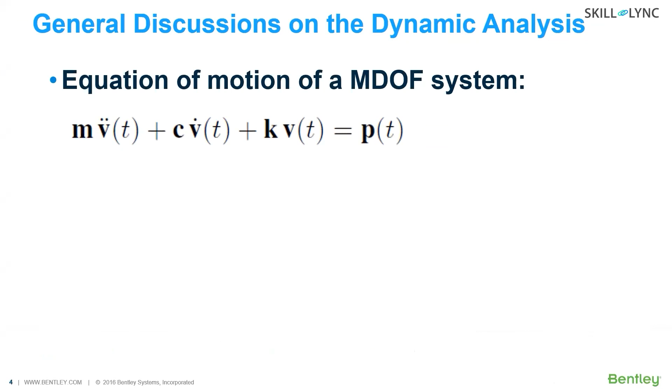So of course we can start off with the equation of motion, which is the backbone of the dynamic analysis of structures. I've taken this as a screenshot from Clough and Penzien's Dynamics of Structures book. So basically, when you have a time variant load applied on a structure, the structure resists it in three ways: as inertial load, as a viscous load, and a spring load, or a stiffness elastic load.

And to solve this equation, what STAAD Pro actually does is employ something called a modal superposition method, where this differential equation is broken up, or uncoupled, into n separate differential equations. And to get the solution of those equations, we would need to solve the Eigen condition. So what appears on the screen is the Eigen condition.

Now, STAAD Pro would employ numerical methods to solve this condition. Just a quick note on Eigen solution: there could be two possible solutions to this Eigen condition. As you can see, one is if the mode shape vector is 0 - that's a trivial solution, because that would mean the structure is not vibrating at all. The non-trivial solution is when you have this expression as 0, and that is what needs to be solved.

So if you actually write that in the form of an algebraic expression, it would result in a polynomial equation of degree n, and thus you would be solving for omega square, since the stiffness matrix and mass matrix are known to you. So what you would be solving for is the value of omega square, and you would get n values of omega as a solution of this.

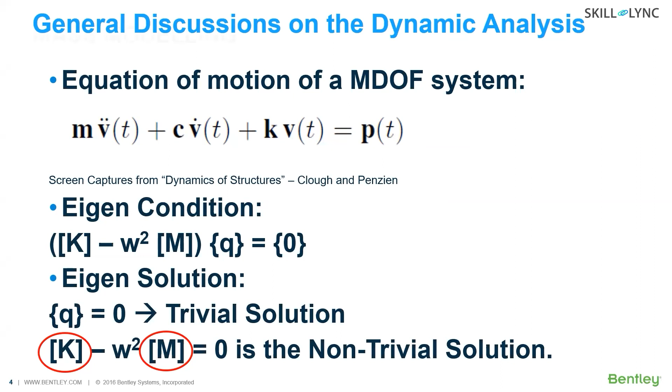Now, one important thing to note here is to have a proper Eigen solution, you need to have a proper stiffness matrix and proper mass matrix. Now, the stiffness matrix is sort of generated out of what you model as the structure, but the mass matrix needs a specific mass modeling. So we will talk about a couple of quick pointers on the mass modeling.

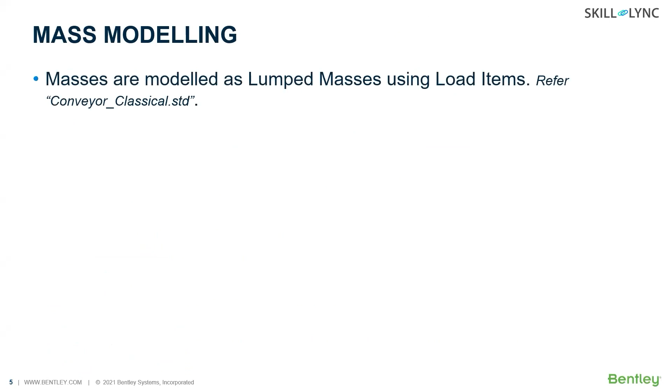So in STAAD Pro, masses are modeled as lumped masses using the various load items, and the load values that you define in those load items - those are force units - you would divide them by the acceleration of gravity, the value of g, to obtain the masses.

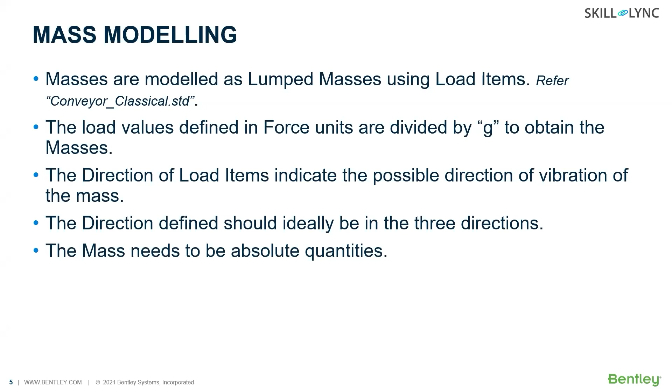And you know that mass is a scalar quantity, right? It doesn't have any direction. But when you define a load, you would define the direction of the load as well. Now, those directions represent the possible direction of vibration of the masses. And to capture the proper dynamic effect, you should specify the direction of vibration of the masses in all three directions. The masses need to be absolute quantities, because this would rule out the possibility of erroneous cancellation of masses.

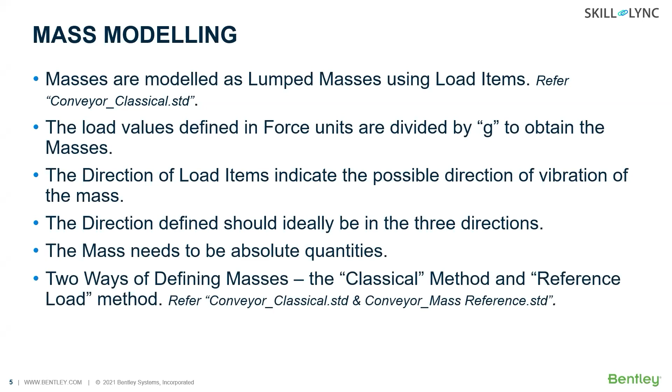We have two ways of defining masses, the classical method and the reference load method. Let me quickly show you how we have done this as a classical method.

Basically, we have this load case one, as you can see in this particular structure. You would see that we have defined the loads as absolute values, in all three directions. But the question may be, then how does STAAD know that these are masses and not loads? Those are distinctly two different things.

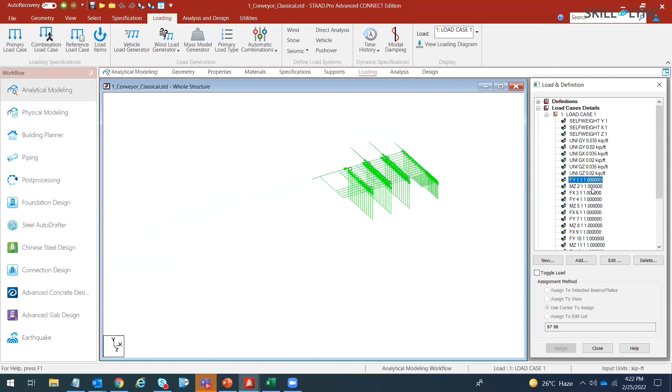Now, any load case that has any dynamic commands involved in it - in this case we have time history commands, which are dynamic commands. Other possible dynamic commands can be the response spectrum specifications, or the modal calculation requested specification. All this would convey to STAAD that it's a dynamic load case, and it would then treat the load items defined in that load case as masses and not loads, dividing the load values you have given by the acceleration due to gravity to get the mass values.

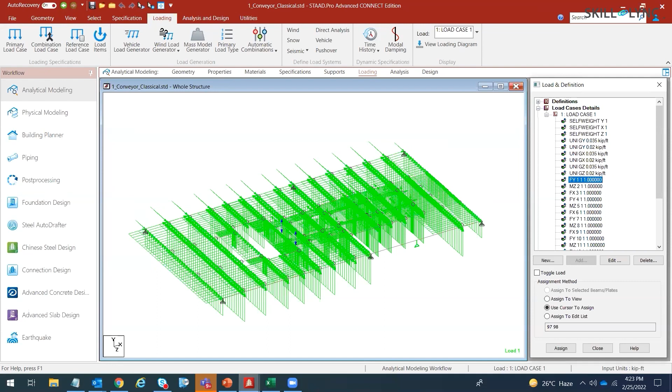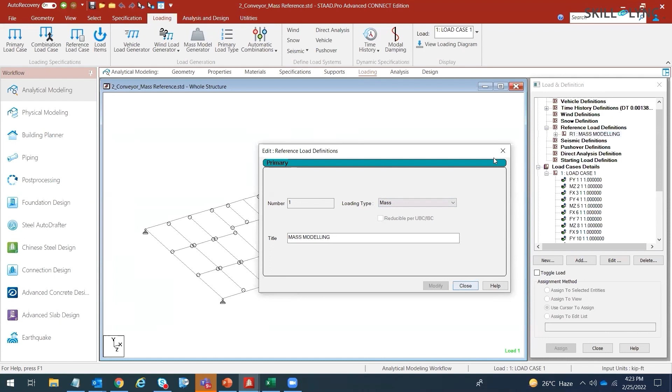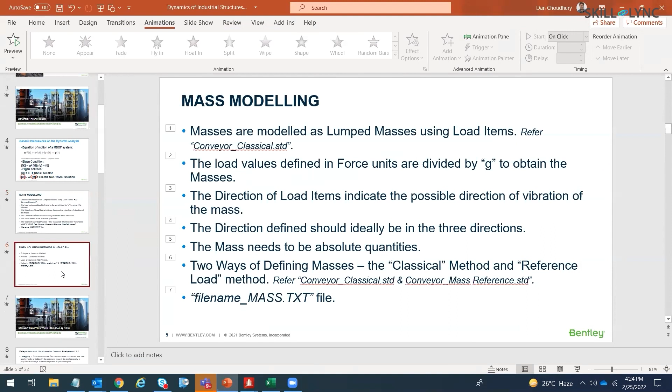So these are some general pointers as to how you should be defining the masses in STAAD Pro. We have seen that users make a lot of mistakes when doing this mass modeling, which results in a completely different set of natural frequencies and mode shapes, because we can see how important that parameter is for the Eigen solution.

So now talking about the Eigen solution methods in STAAD Pro, we have the subspace iteration method. You may be knowing that STAAD Pro has two modes: one is normal STAAD Pro, the basic version, and STAAD Pro Advanced. Both STAAD Pro and STAAD Pro Advanced have the subspace iteration method, a numerical method of solving the Eigen condition. In STAAD Pro Advanced specifically, you also have the Arnoldi-Lanczos method of solving the Eigen condition. Both of these are extremely well-known numerical methods to solve the eigenvalue problem.

But the advantage of Arnoldi-Lanczos method is that in systems which are huge or substantially larger, you would have a faster convergence of solution using the Arnoldi-Lanczos method than a subspace iteration method. But both of them are equally stable methods.

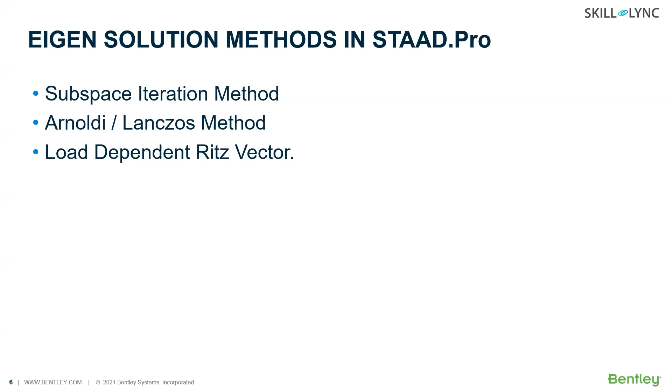I would like to talk about a specific type of eigen solution that we have, which is the load dependent Ritz vector, where we do not solve the eigenvalue problem using the natural modes, but we use the Ritz vector instead of the natural mode shape vectors. Now let me show you a quick example of how this load dependent Ritz vector can help.

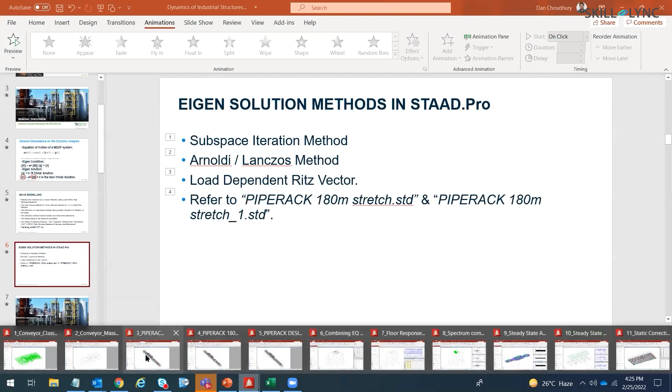Let me go to this particular STAAD model, and you can see that this is the model of a pipe rack structure, which is very long and is a common case that you encounter in industries or industrial structures. I have already run the analysis of these structures to save time, and if you look at the participation factors of this...

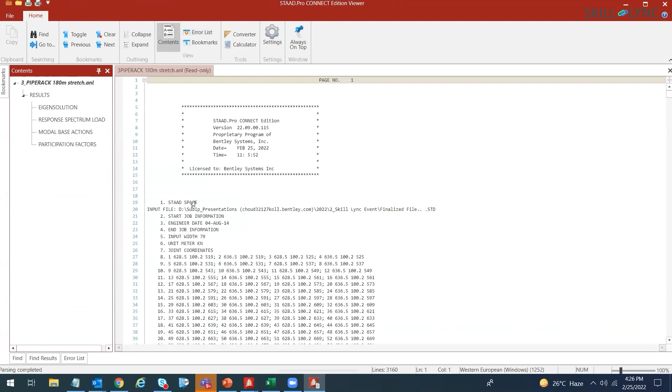Let's say that you are doing a seismic analysis for this whole structure, and you are doing a response spectrum analysis. The code would require you to achieve a 90% mass participation in either direction.

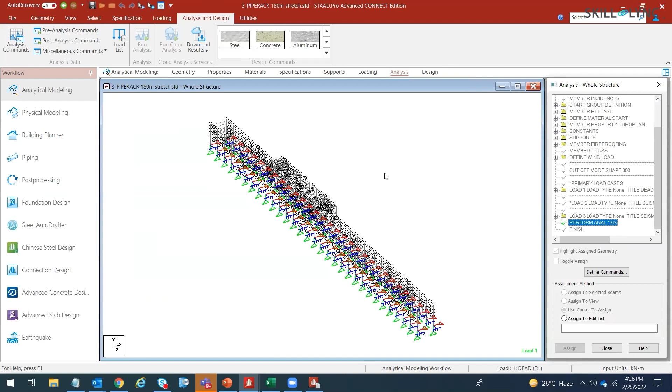Now, if we look into the participation factors here, let me make the fonts a bit bigger so that you can see that easily. So you can see that we do have some good participation in the first 3 or maybe first 5 modes, but after that we have very insignificant mass participations, a lot of which is due to local flutter. Once you are satisfied that this is not due to any instability problems, you know that these are insignificant modes which don't help you obtain your total mass participation.

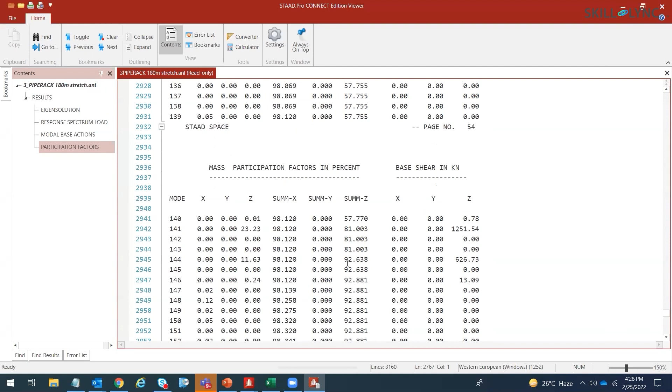So you can see that to get a total mass participation in the X direction of 90%, you need to run the whole system for at least 53 modes, but you do not have any mass participation in the Z direction. For getting the mass participation in the Z direction, you would need to run for even higher modes, and you would see that finally, in the 144th mode, you obtain the mass participation of 90%. So it's a clear indication that there are a lot of insignificant modes in this structure.

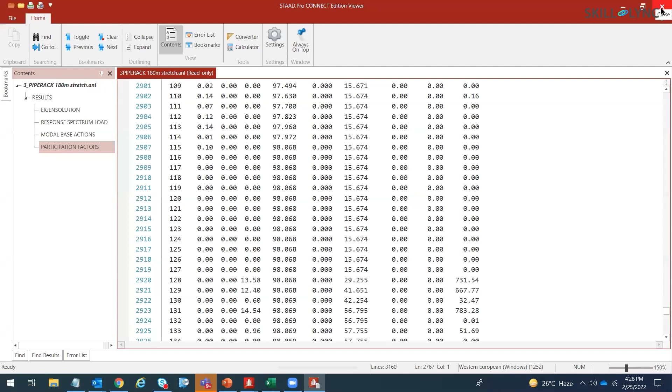And if we use the natural mode shape solution to solve the eigenvalue problem, or the natural mode shape from the normal eigen solution that we have done, we would need to run for a lot of modes. Instead, if we use the Ritz vector, one of the things that you could do is, okay, let me show it this way.

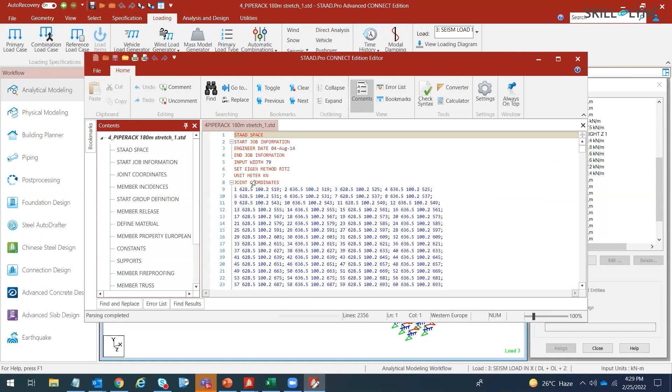So if you go into the text editor here, you can see that I have set the eigen method as Ritz. And if you actually run the Ritz vector, what will happen? You'd see that we actually obtain the participation in just 20 modes.

And you can see that we have run it only for 20 modes, and the first 13 modes gave a 90% participation in the X direction, and for the mass participation in the Z direction, 90% mass participation, we had obtained it by the 18th mode.

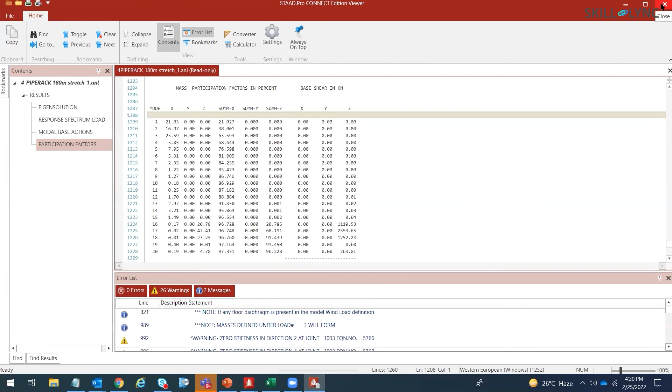So it saves a lot of unnecessary time and unnecessary analysis time if we use Ritz vector instead of the natural mode shape vectors. In fact, a lot of the dynamic pundits around the world suggest using Ritz vector rather than the natural mode shape vectors. So in STAAD Pro, you can use either of it.

If you want to use the natural mode shape vectors, you can use the Arnoldi-Lanczos or subspace iteration method of eigenvalue solution. And if you have a lot of unnecessary insignificant modes, you can flush them out by using the Ritz vector.

Okay, now let us go back to our slides. And this is the topic that we are going to spend a significant amount of our time on, which is the seismic analysis to IS 1893 part 4.

To start off, sorry, I'm still in the eigenvalue solution mode. To understand IS 1893 part 4, I'm sure you know about it already. Part 1 is a well-known code meant for solving, or meant to guide you as for the seismic analysis for buildings or any other general structure. IS 1893 part 4 is specifically meant for industrial structures.

There are two parts to that code. One is meant for general industrial structures, and the other section is specifically meant for stack-like structures. We are going to speak only on the general industrial structures for now.

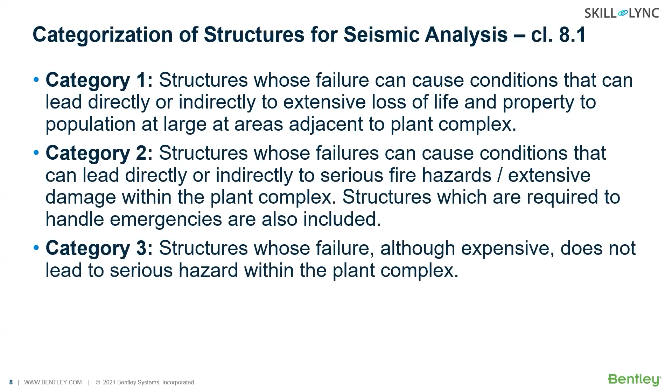Category 2 structures would be whose failure might cause serious fire hazards and extensive damage within the plant complex. Category 3 structures would be those which the failure of which might be expensive but does not lead to serious hazards. Apart from all these three categories, all the other structures would be categorized as category number 4.

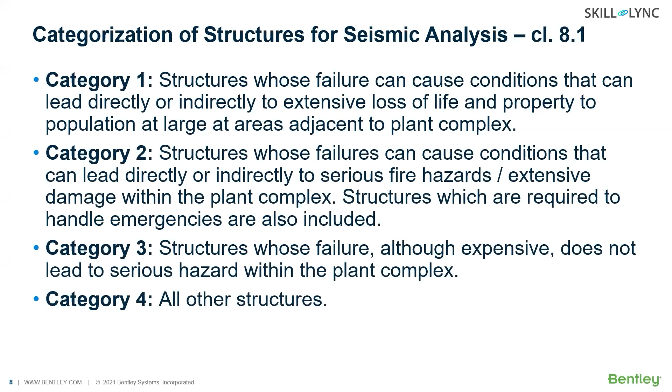Now, when we speak about the code, we will see how important it is to understand these particular categories.

The code in clause 10 also gives us situations where we can choose to use dynamic analysis, or we have to use dynamic analysis, and there are situations where we can choose to use static analysis instead of dynamic analysis.

So structures of category 1 in all seismic zones, you have to do a dynamic analysis. Structures of category 2 in seismic zones 3, 4, and 5, you have to do a dynamic analysis.

Structures of category 3 in seismic zones 4 and 5 have to do a dynamic analysis. All the other structures can be analyzed using the simplified static analysis. We are not going to discuss the static seismic analysis in this course. The title is about dynamic analysis, but I just wanted to let you know at this point that

the simplified analysis has also been implemented in STAAD Pro. The dynamic analysis can be in two categories: time history analysis and response spectrum analysis. So this is what the code says.

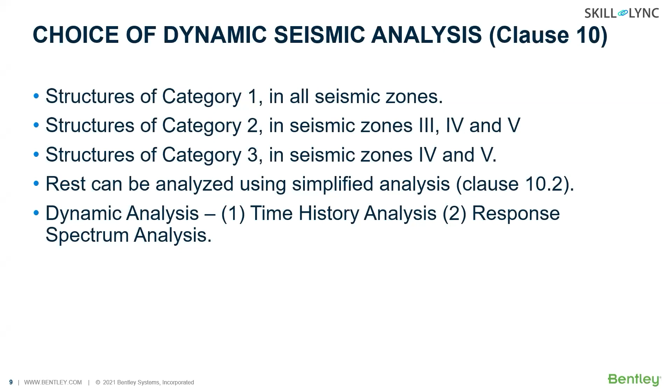Now there are a couple of additional mass modeling guidance that the code gives. This would be in addition to what I had just discussed, and what the code has suggested is to consider the structure equipment interaction properly. Industrial structures generally have a lot of equipment stacked on them, like cable trays and pipelines. There are also vibrating machineries that sit on industrial structures. So you have to consider the interaction between those equipments and the structure.

That's why there are some additional mass modeling guidelines given in the code. If your structure has rigidly mounted equipment which is rigidly connected to the structure, you can model those as lumped masses. There could also be flexibly mounted systems that are stacked on the structure.

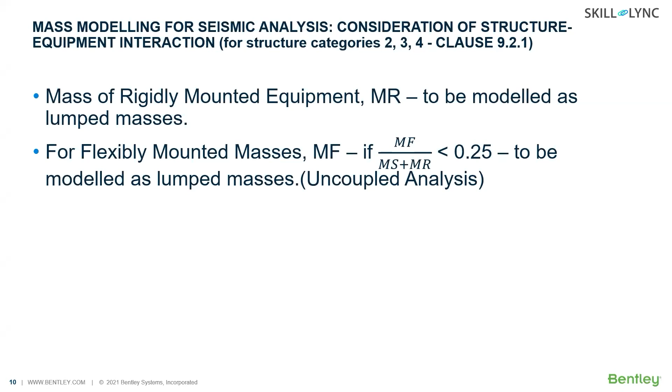Flexibly mounted system would mean equipment that is positioned on the structure using isolator supports, and you can still model them as lumped masses if the percentage of the flexible masses is less than 25%. But if the percentage of flexible masses is greater than 25%, the code envisages that this would lead to a structure equipment interaction, and you have to do a coupled analysis.

So the code suggests to actually model the support system. Now, at this point, we do not have the modeling of isolator support systems in STAAD Pro, so we can only do an uncoupled analysis using the lumped masses at this point. So these are some additional guidelines that the code gives for seismic analysis of industrial structures.

Now, what I have just discussed is only valid for category 2, 3, and 4 structures. A category 1 structure has a different requirement, which I am not discussing here.

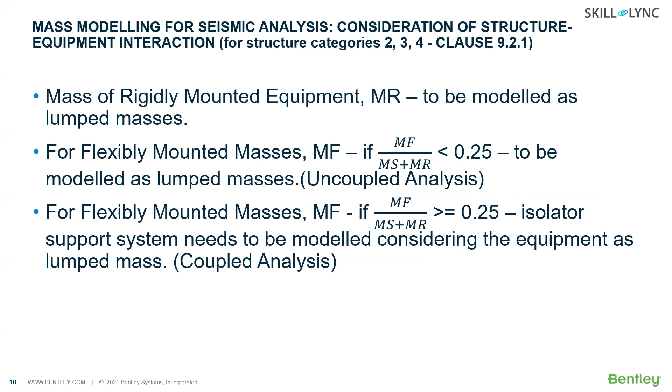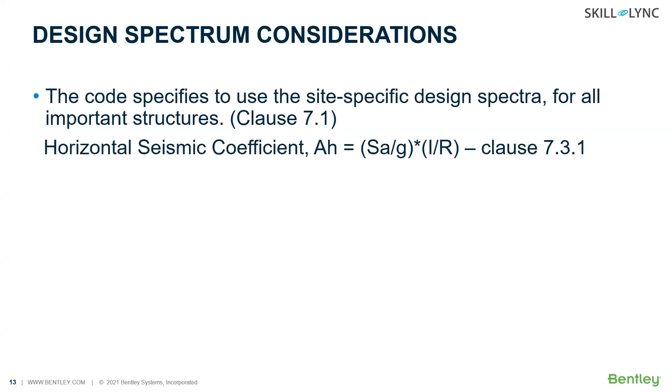Though if your SA by G values in this equation are not scaled to the peak ground acceleration, then you have to multiply that with the peak ground acceleration to scale it to that particular value. The code suggests that you have to compare that analysis with the standard design spectra that is given in Annex B of the code, which has to be taken as a minimum.

For less important structures, you can directly use the code-specific response spectrum. And of course, the horizontal seismic coefficient is given by the well-known equation that is given here.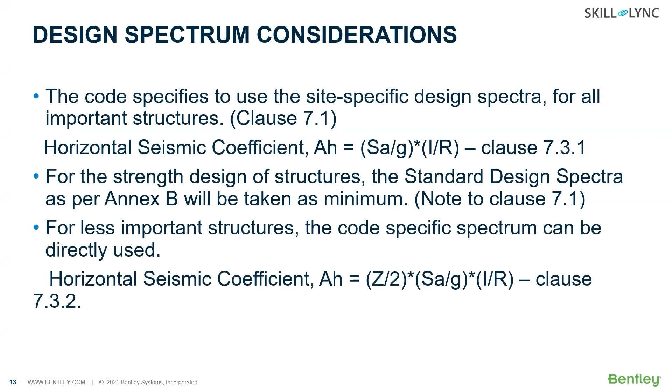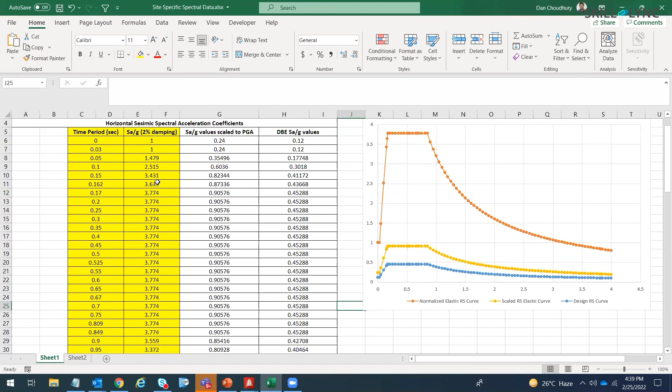Now I just wanted to show you something. I had data on site-specific spectra, which was sent to me by somebody. It was a steel structure, so I have only taken the 2% damping values here. You can see that against the 0 period, we have the SA by G value as 1, which is a clear indication that this has not been scaled to the peak ground acceleration.

If the response spectrum data is given in this way, then the report would also have the recommendation for the peak ground acceleration to be considered. In our case, we can see that the peak ground acceleration is 0.24 G that was given by the report.

So that would mean that your spectrum, which originally—this is the elastic spectrum, the brown spectrum that you see—that's the normalized, unscaled elastic response spectrum curve. And when you scale that to the peak ground acceleration of 0.24 G, which would mean that you need to multiply, these are the scaled values.

So you need to multiply the unscaled values with the peak ground acceleration to get the scaled values here. And then the blue colored spectrum would give you the design basis values, the values that you would need to use for design.

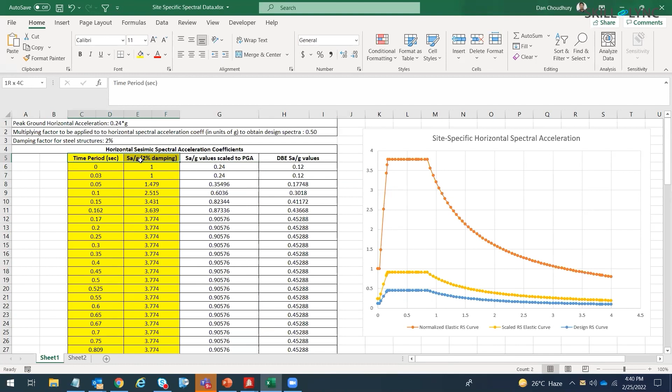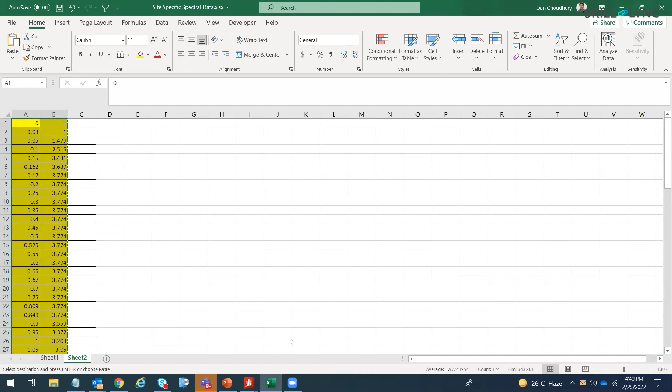But you do not need to manually do this as I've done in this Excel sheet. All that you can do is define these values directly in STAAD Pro. So what I have done is I have taken these values in another sheet like this, and what I can do is copy these values and take it to... I'll add response spectrum load case here.

So all that I do is I go and paste this value. So I have actually unscaled elastic response spectrum curve. I have defined the data here.

And I can select the code, and you can see that we can select the IS1893 part 4 2015 code. And the combination method is I would always prefer CQC. The code suggests a few methods, but CQC I've always preferred because it takes care of any possible interaction between the closely spaced modes. So we take that as CQC. Oh, I think I had messed up something.

Anyways, I need to choose the custom response spectrum and paste the values here. Let me check if I've done it correctly. Okay, yes. Now, you know that these are the unscaled response spectrum values.

So we need to scale that down to the design basis values, as I have just shown to you in the Excel sheet. So how can we do that? We can do that using the direction factor.

So we need to define, let us say that we want to define the seismic load in the X direction. So what would be the direction factor? Let me quickly show you the calculation of what the direction factor would be.

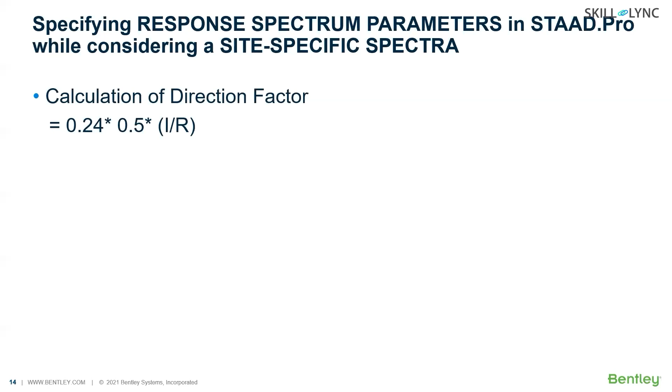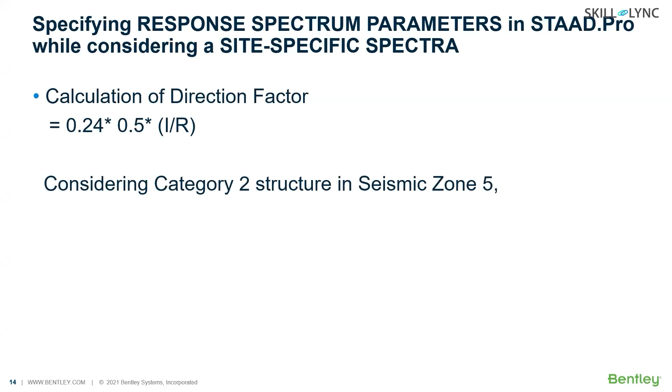So let us consider that our structure is a category 2 structure, and let us say that it's in seismic zone 5. In that case, if you look at table 3 of the code, the importance factor would be 1.5, and the response reduction factor, considering a steel frame with concentric braces, would be 4. So the I/R value would be 1.5 by 4, that is 0.375.

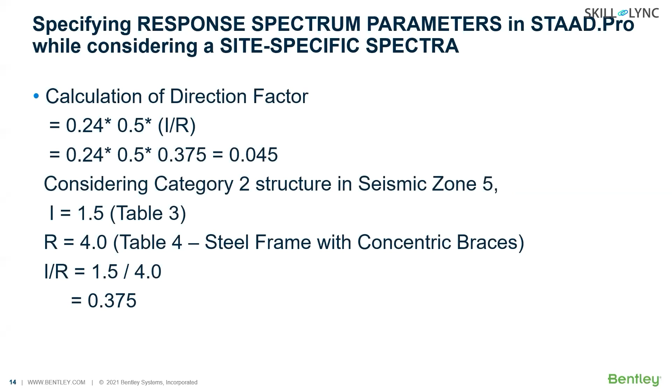Now, if we substitute this value in the direction factor calculation, we get the direction factor as 0.045. So that's what we need to use as the direction factor. The time really is running out, so I have to do this fast.

Okay, and damping. Now we have to specify this as the damping value. Now a lot of users ask us this question - we have already defined the spectrum for 2% damping, so why do we need to consider damping value again?

Does this reduce the spectral acceleration defined even further? The answer is no. We would need this damping value to define the modal combination, because if you look at the expression of the CQC modal combinations, it has the damping factor in it. So this damping factor that we define here goes into the calculation of the CQC combinations.

Okay, so we define the damping here. Now, next thing that we do is we need to define the scale factor. Now, in this case, we have the SA by G values, so we need to scale that up, multiply that by the value of G. So we have to multiply that with 9.81.

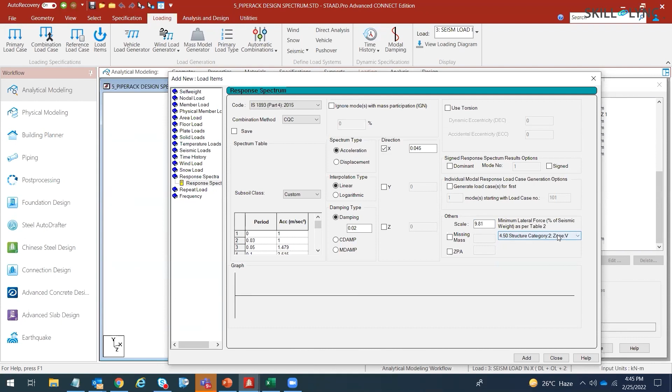And then the code requires, as per table 2, that you have a minimum lateral force requirement. There's a minimum lateral force requirement in table 2 of IS 1893 part 4 code. And for category 2 zone 5, it is 4.5% of the total seismic weight. So we select that value and click on add. This completes our spectrum definition.

This is how you would need to define the spectrum specification to IS 1893 part 4 in STAAD Pro. Now, remember that the code also requires you to check it against the code's based design spectrum.

Actually you need to have another load case. This is currently not automated. You need to have another load case with the code specified design spectrum. You have to check the base shears, and if the code based design spectrum base shear is higher, then you have to scale up the first results. So you have to find out the ratio and take that ratio as the scale factor, and then you delete the load case related to the response spectrum that you have defined from the code.

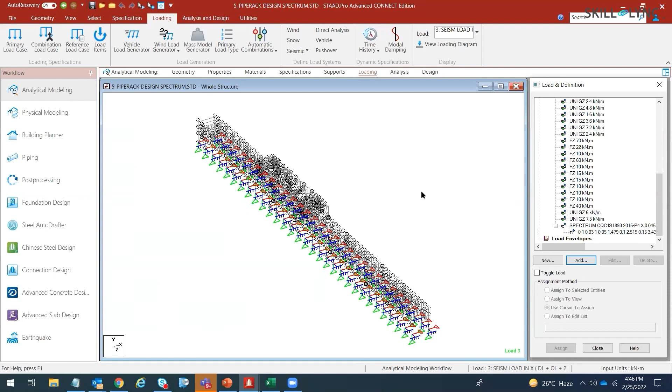Okay, so that's the response spectrum. Quickly wanted to talk to you about combining the component earthquake load cases.

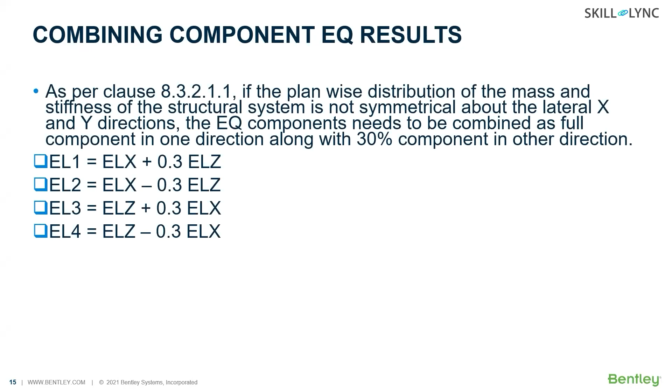Now, the code says that if the plan-wise distribution of the mass and stiffness of the structural system is not symmetrical about the lateral axis, you need to consider a full component in one direction and 30% component in the other direction. I'm neglecting the vertical effects here for now. So as a total earthquake case in one particular direction, you have to consider the full earthquake effect in that direction and the 30% effect of the earthquake in the other orthogonal direction. Or you can use the SRSS combination to find out the complete earthquake load before you take it to the design combination.

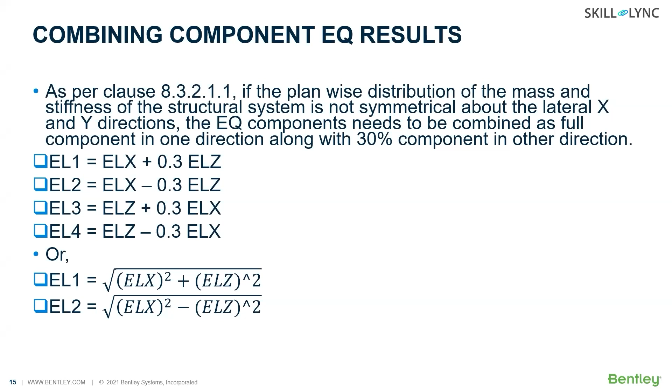Now the question is, how do I know if the mass and the stiffness distribution are symmetrical or not? Well, estimation works for simple structures, but for complicated structures, it won't be easy to make that out. But there are certain pointers in your analysis results itself, so I wanted to show you that.

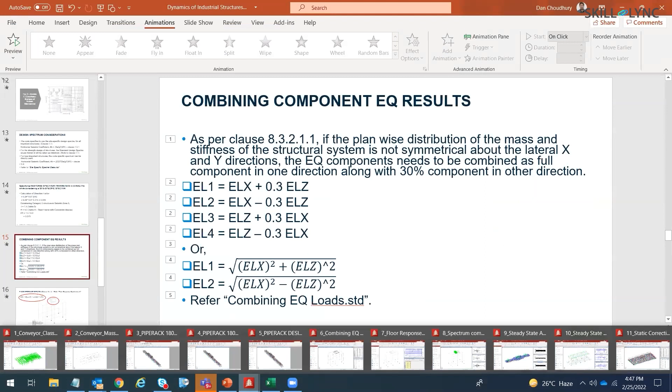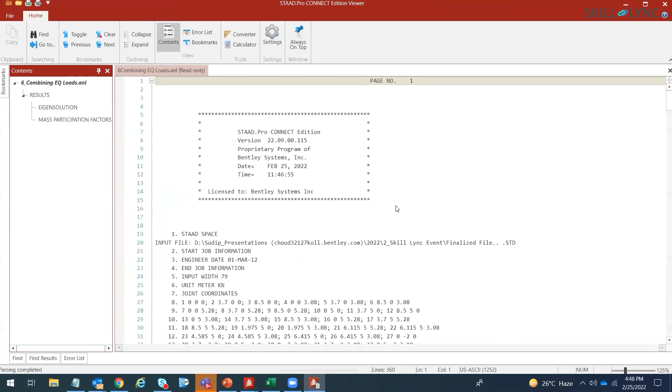So if you take this structure, for example, there's a clear asymmetry of distribution of the mass and stiffness. If you actually run the analysis, you just do a modal calculation requested command, and go and check the modal participation factors, or the mass participation factors, and you can see that in the first mode there is significant participation in both the X and Z directions.

For the first mode you have 24% participation in the X direction, 49% participation in the Z direction. For mode 2, you have 55% participation in the X direction, whereas 25% participation in the Z direction. And then you have a torsional mode. If you want to know whether it's a torsional mode or not, you have to actually verify that. It could be an insignificant mode, it could be a local flutter mode, but even torsional modes are characterized by these low values of mass participation.

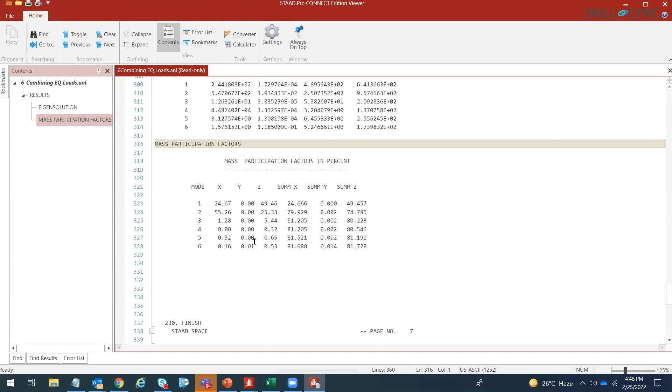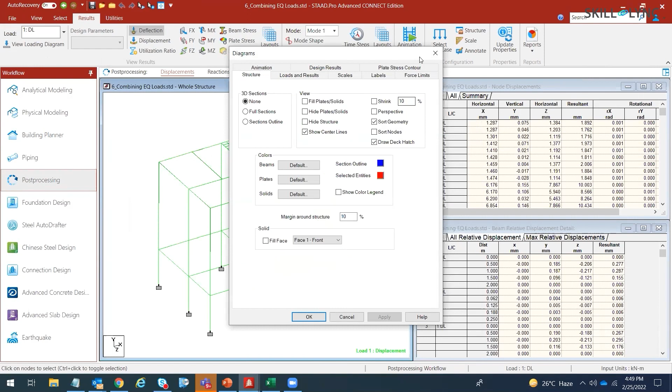If I go to structure diagrams and pull this out, and if I go to animation, if I go to modes, and apply, now this is the first mode, and you can clearly see that there is participation in both the X and Z direction. Now if I change it into mode shape number 3, you can see that it's a clear torsional mode. So basically mode shape number 3 is a torsional mode.

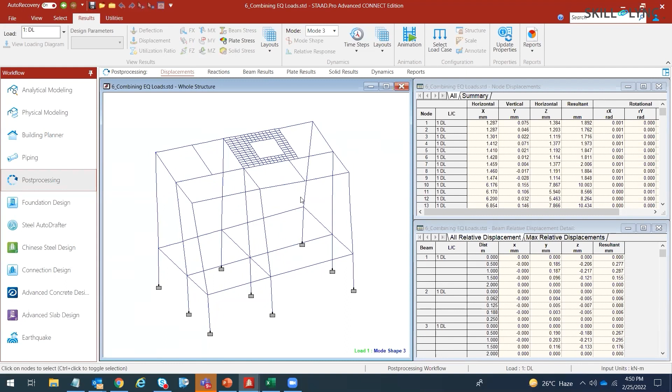So here's my suggestion: check your mass participation results, and if you see that there is mass participation in the same mode in both lateral directions, or if there is a torsional mode in the first 5 modes, you would know that there is definitely an asymmetry between the mass and stiffness distribution. In those cases, you need to consider the 30% components as I have just shown.

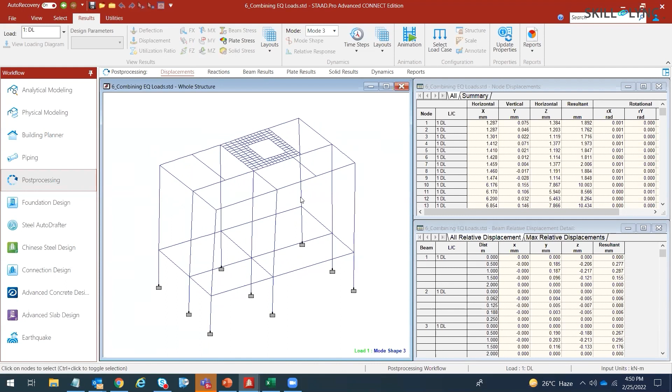All right, now this is something which is a bit advanced. It's called the floor response spectrum. I think I have 10 minutes, so I have to really go fast. So this is a frame, and you could see the mesh with the plates where we have, just imagine that it's an equipment that is sitting over there.

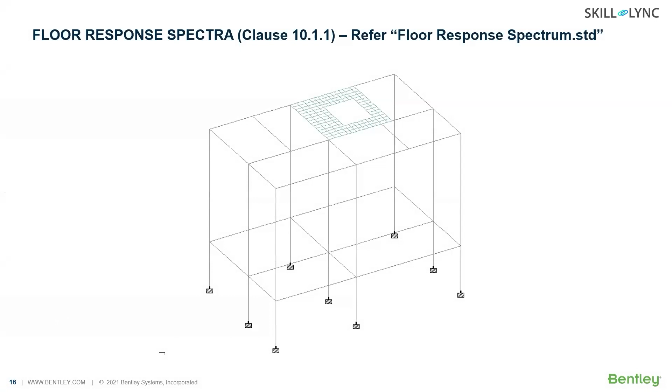So this is the area where the equipment is sitting. Now let us say that this structure is hit by an earthquake. The earthquake motions will affect the base first, because it's the ground that would be moving. This would mean that the whole structure would start moving, right? The analyst of that equipment would want to know whether his equipment is safe if this earthquake hits. So how does he do that?

He cannot use the direct earthquake signals that we have here, because this acts on the ground level, right? But the equipment is sitting on the floor level. So he would need to know the vibration at the floor level, which would be the base input for the equipment.

Now, how we can do that: once this earthquake hits the ground, we do a time history analysis against this particular earthquake, and we get all the time-dependent acceleration for that particular area where the equipment is sitting, at all the nodes. So we'll find out the average acceleration at all the time points in the particular direction in which we want to analyze the equipment.

Then we solve this particular equation. Now those accelerations that we found out will be input on the right side of the equation as minus ft double dot. Then we input the damping value of the equipment and also the natural frequency of the equipment, and solve for the displacement. From that displacement, we can calculate our response spectrum, which can be used for earthquake analysis of that equipment sitting on top there.

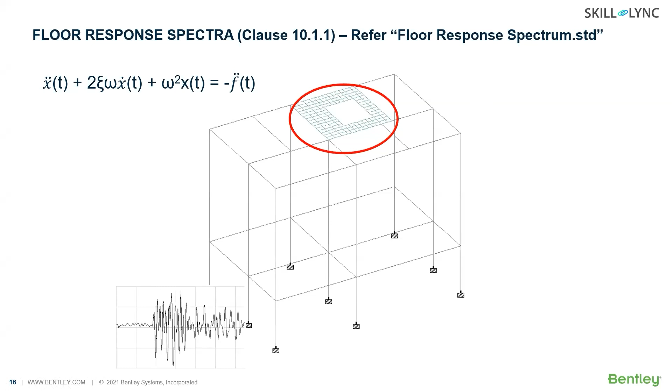So this is the concept of the floor response spectrum. I just wanted to quickly show you how you can use that. So this is the floor response spectrum.

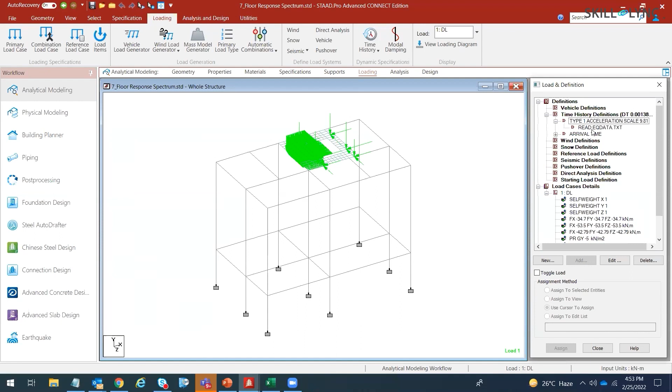Let me go to the analytical mode, and you can see if I go into the loading option, the first thing we have done is a time history definition here. In the first case, we have defined a ground motion, and given the ground motion data as the EQ data, which is a notepad file that has all the records of the El Centro earthquake. So we have input that motion at the base of the structure, and we did a ground motion analysis.

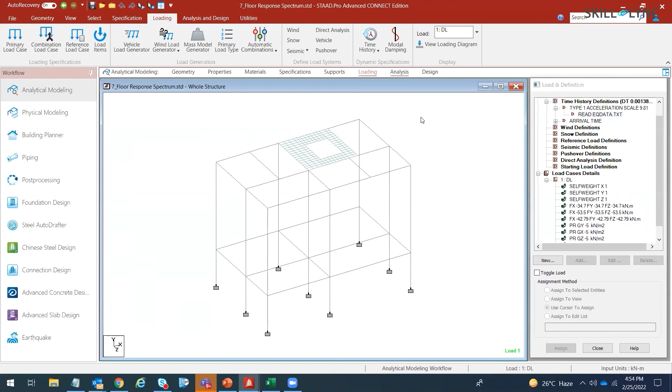Then what we did was define these values, and said that we want to generate the spectrum for 2% and 5% damping, and we ran the analysis.

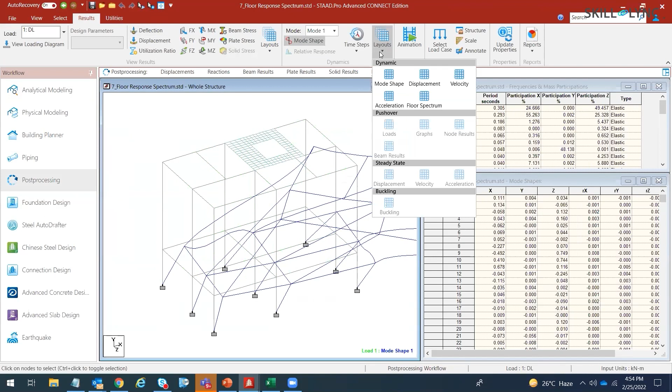The code, if we go now into the post-processing mode, and go to the dynamics tab—or you don't even need to go to the dynamics tab—if you go to dynamic and floor spectrum, you see that we have the floor spectrum. Now you can hand over this floor spectrum to the equipment analyst to give him an idea, so he can use this as an input for his equipment analysis.

And you can change the values. So we have 2% damping here, and if we change it to 5% damping, both the tables and the graph would change. So you can hand over this data to the equipment analyst, as I've said.

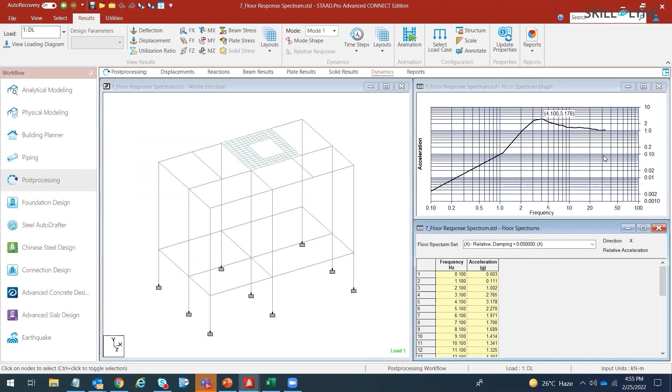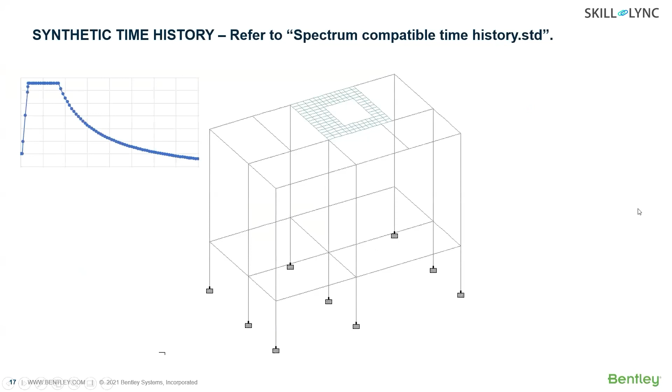There is another way, another thing you can do in STAAD Pro: you can convert a response spectrum into a statistically equivalent time history load and actually analyze the structure for that. As I'm running out of time, I won't show you the STD file corresponding to that, but I have it.

But this can be important in cases of say category 1 structures. Now response spectrum doesn't capture the phase relationship between the various modes, okay? And this is only captured by the time history analysis, but you do not have time history data for all possible cases—you only have the response spectrum data.

So what the code now suggests, or codes around the world are suggesting, is that you can convert that response spectrum graph into a synthetic time history. Synthetic means artificial—it is not an actual time history, but you convert that to a statistically equivalent time history and apply that as a ground motion to analyze the structure.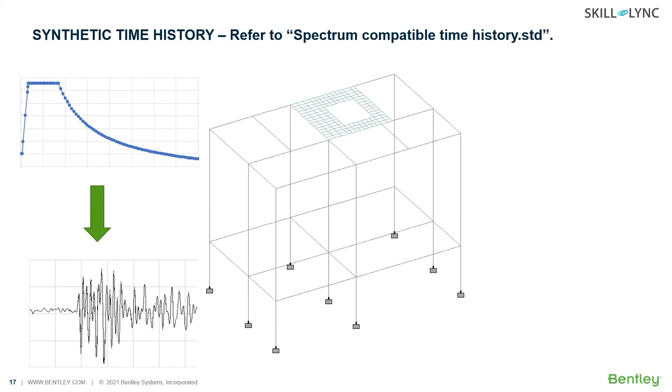Okay, so we even have that facility in STAAD Pro. Now, that finishes the seismic analysis of industrial structures.

We just wanted to spend a couple of minutes on forced vibration analysis. I wanted to tell you about a case that came to me once, where one of our users came to us and said that the structure they have and the equipment it is supporting, when the equipment runs, the structure vibrates so much that the cable is cut off or the pump is destroyed.

A lot of things like that were happening because of excessive vibration. Now, what generally the engineers do is they only check the natural frequency against the forcing frequency to ensure that there is no resonance. But even if there is no resonance, if the stiffness requirements are not good enough, the structure will vibrate too much. And in this case, that was exactly what was happening.

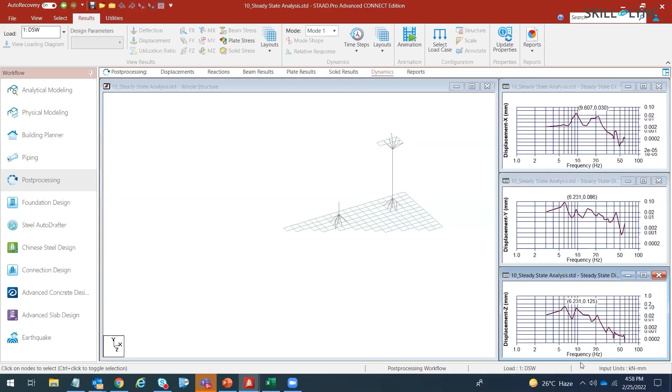For that, you actually need to do a time history analysis, see the steady state results, and then convince yourself that the deflection you're going to get is not going to affect your equipment. So how do you do that? I'm just going to quickly show you a steady state analysis case where you apply a time history load.

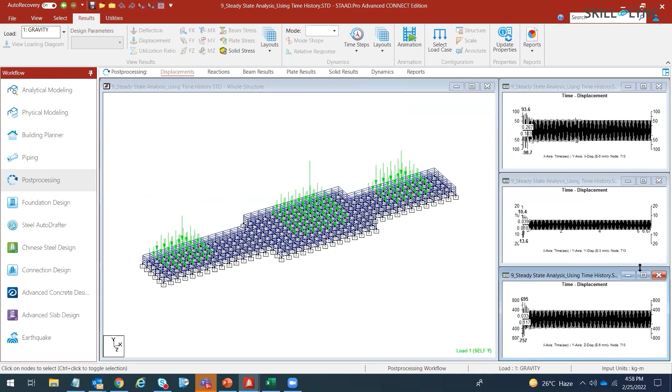Let us take up, this is a turbine foundation model that you see, and the time history loads from the turbine have been input as the forcing function on this turbine model.

When we solve for that equation, what we see here, the way we need to handle this is, you could see that there are some excessive displacements at the top at the beginning of the time, but then gradually it settles into a very steady pattern. The reason why you see an uneven vibration at the beginning is because of the transient phase that exists in the vibration.

Transient phase is because of the natural modes of vibration that also take place, but the transient modes of vibration, as you know, would die down because of the natural damping in the structure. Finally, once the natural vibration dies down, all that remains is the forced vibration by the equipment. So that's what you see.

So what you need to do is ensure that you run a sufficient number of cycles so that you attain the steady state, and you would immediately get an idea of what the steady state is. Look at these areas - you could see that it has settled into a rhythmic vibration here. So once this part was over, after this time, it settled into a rhythmic vibration. This is the steady state that has been achieved.

Now the engineer needs to check whether this peak vibration, the peak steady state amplitude, is within tolerable limits. Will that keep the structure safe? That's what they need to do. Of course, it's important to check the resonating thing, but even after checking that, it's very important to understand whether the steady state amplitude is within tolerable limits or not.

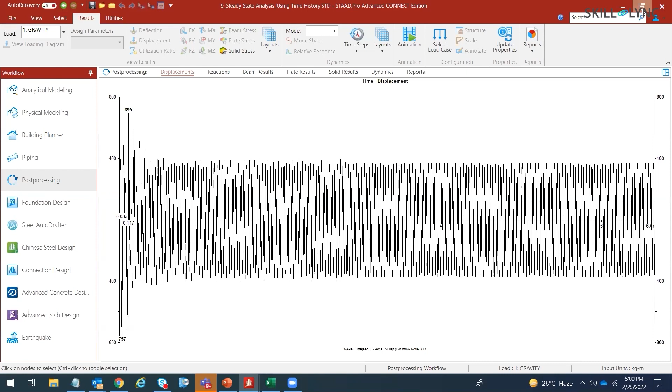There is another way of doing steady state analysis in STAAD Pro using the steady state module, where we do a frequency domain analysis, running the analysis for a range of frequencies, and we have plotted all the frequencies against their peak displacements. Based on that, we can see what machines would fit in the structure.

And we have run it from around 3 hertz frequency to around 60 hertz frequency, and we can see that the highest response would be for a frequency of 6.231, where the displacement was around 0.125 millimeters.

So this can be done by the steady state module, because once you are running or interested in force vibration results, you are generally interested in steady state results. You are not really interested in the transient state. So you can use the steady state module to gauge a number of frequencies together using this particular graph.

Okay, so the steady state module again is available now. Most of the features that I have shown you - the advanced analysis features like floor spectrum, the synthetic time history, the steady state module, etc. - they are available in the STAAD Pro advanced module.